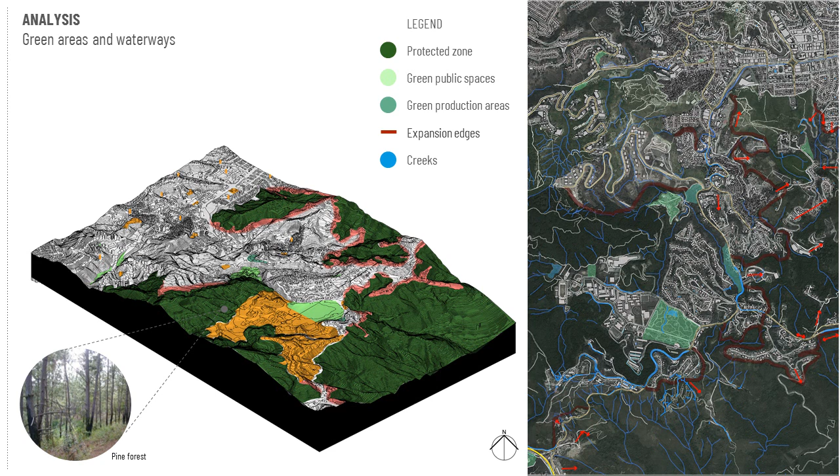This can acquire an important sociocultural and socioproductive role, together with institutions located in the different sectors. These are close to various green areas that need to be protected, such as large wooded areas, integrated, such as existing parks, or intervened, such as areas that are wasted, devalued, or unstable. Currently, what keeps them related are the roads, and some have been extended enough to have the opportunity to merge, such as that of La Limonera with Manzanares.

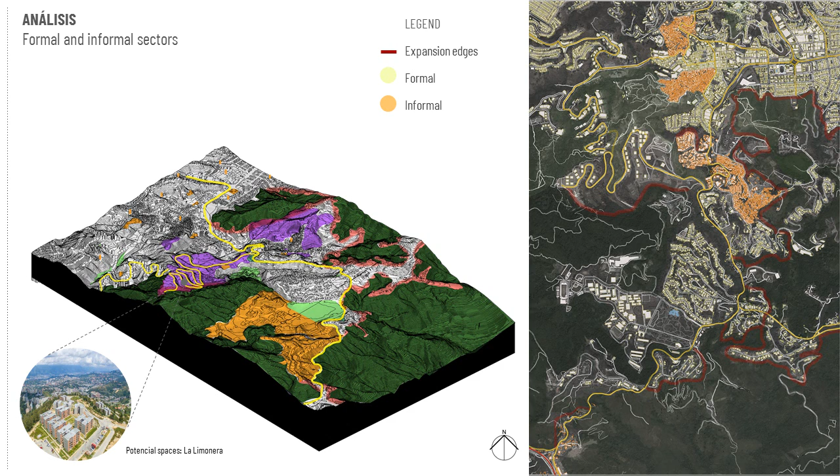Throughout the green areas, the aim is to create integration spaces between the formal and the informal and the less consolidated areas. The objective is to generate a symbiosis between the communities of Baruta that today are disconnected, creating spaces that take advantage of the existence of educational institutions and the opportunities offered by the land as a dynamic of University City, where academic, recreational, and productive activities take place, with a sense of ecological and sustainable development.

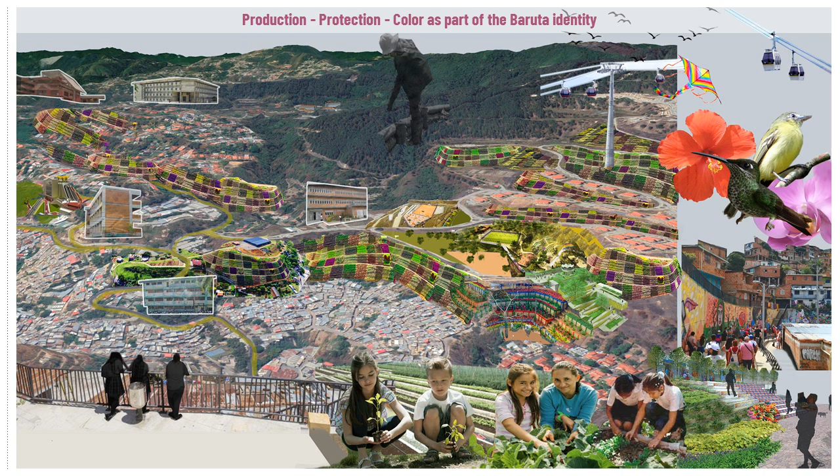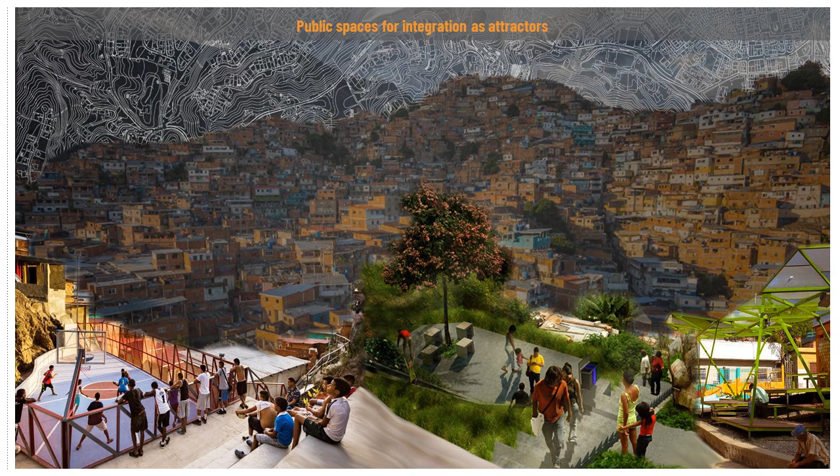Considering issues such as the protection of the environment, production, and color as a part of the identity of Baruta, as well as educational institutions as promoter, public spaces for integration as attractors, and mobility and meeting spaces.

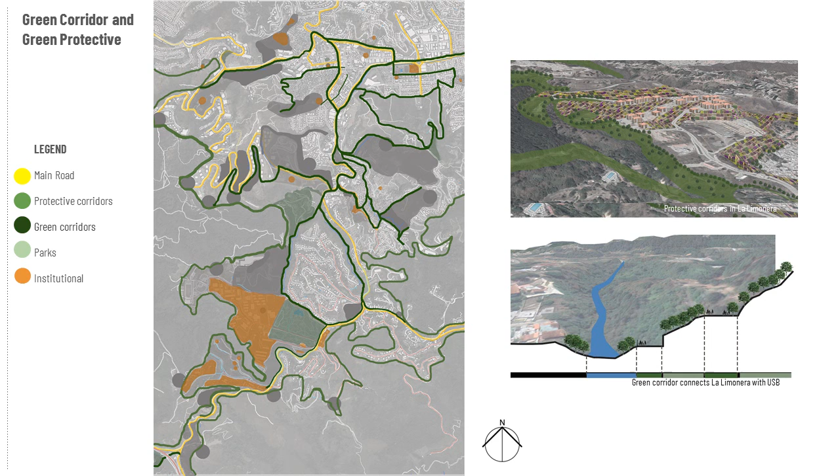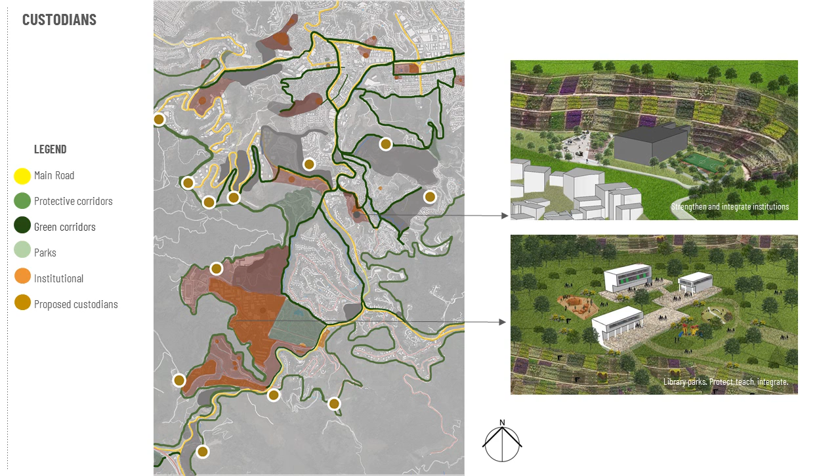In our project, we propose green and protective corridors developed around protecting and generating connections by relating existing institutions with communities. From this relationship that we seek to generate, we propose new custodians through educational and sociocultural facilities, such as library parks, around which our field of expansion will be demarcated, while promoting the existing educational centers.

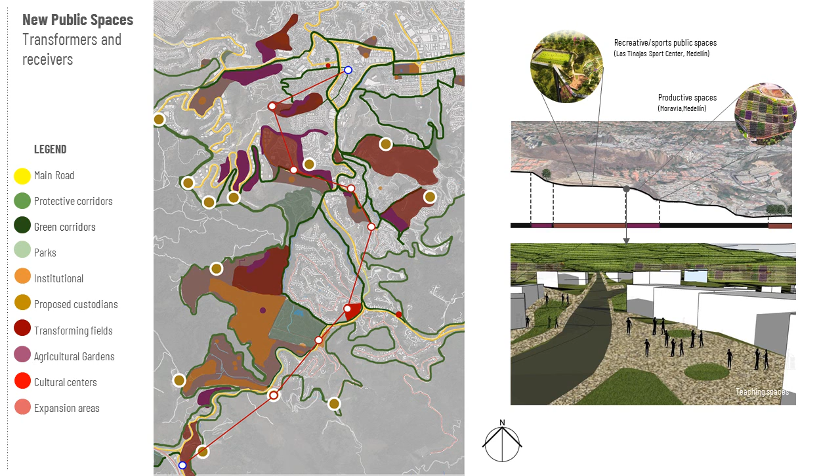Potential areas are identified, where public spaces are proposed with training and recreational activities for the integration of communities. Areas are available for relocation and residence, as well as productive spaces to control the growth and sustenance of the communities. Connectivity is reinforced through a cable car system that allows bringing education and culture to the communities, connecting public spaces associated with institutions.

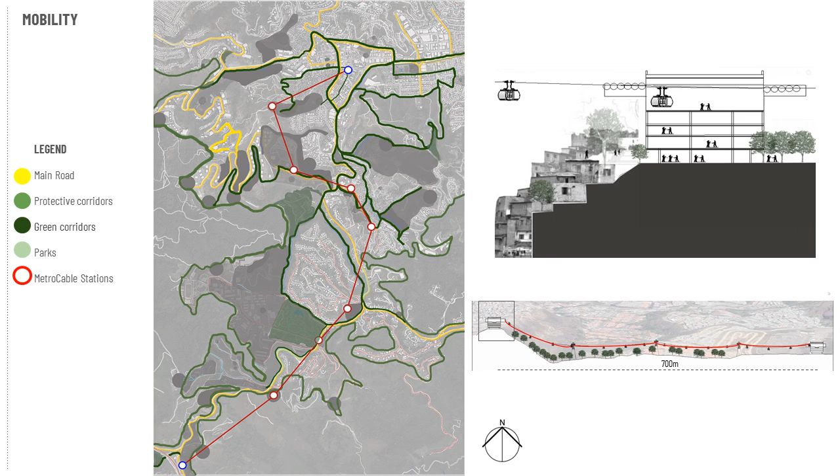At the end, there remains an integration of the public space linked to educational and cultural facilities through a system of connectivity with a sense of ecological development and protection.

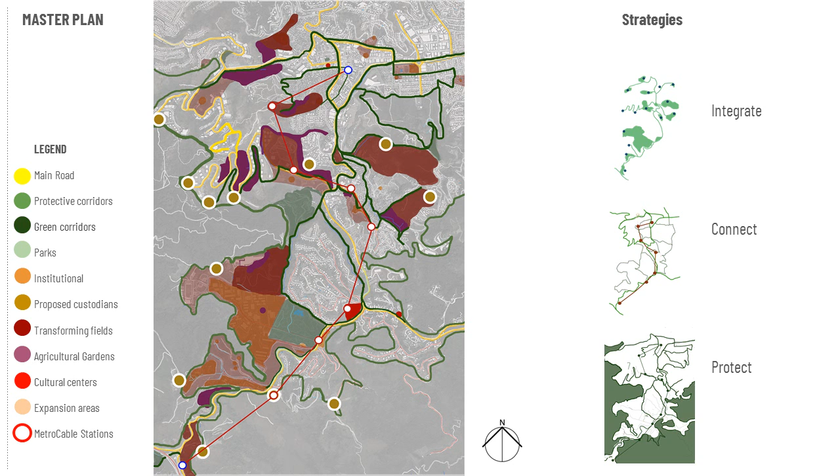We start the intervention in 4 points that will allow the project to connect with the rest of the city, integrate the communities, generate connections within the same project, and strengthen the role that the university can take and contribute in the site. Intervention 1.

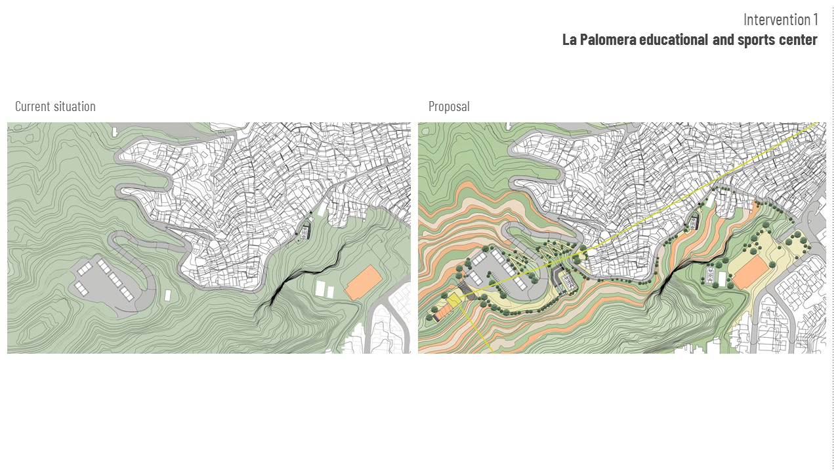La Palomera, Educational and Sports Center. In the La Palomera sector, there is a lack of public spaces, due to its status as an informal settlement, resulting in a lack of accessibility to the neighborhood.

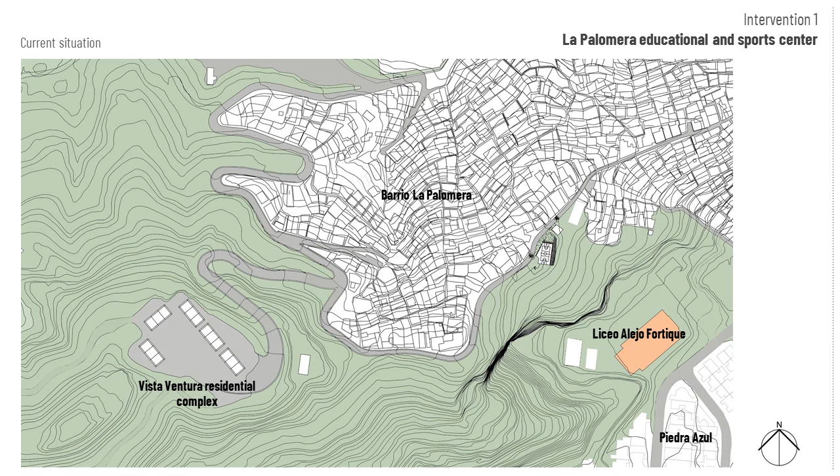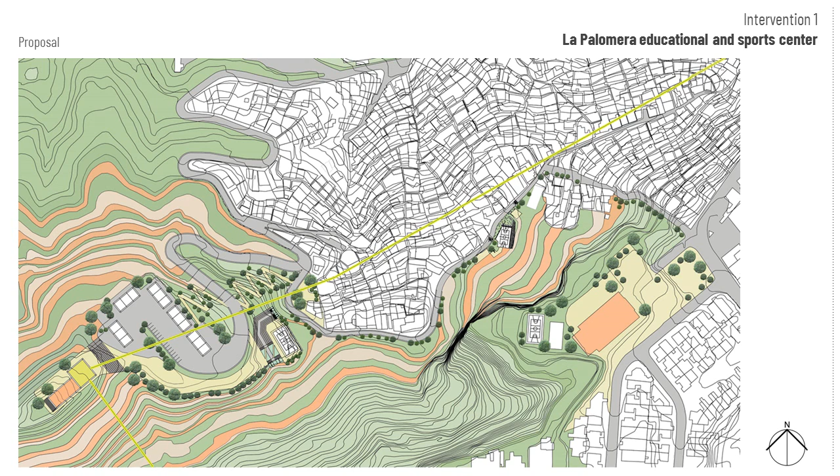The proposal seeks to give them the opportunity to recover these spaces for the enjoyment of the community, promoting educational, cultural, and sport activities. Likewise, a cable car station is proposed that connects both north-south and east-west, in this case directly with the town of Baruta.

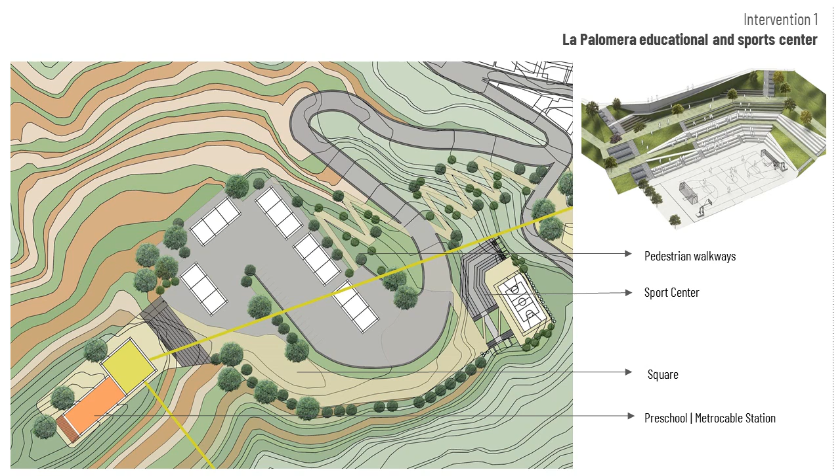Mainly, an attractive point is proposed, finishing in the highest part of La Palomera, guaranteeing more generous spaces to the community and providing a sense of belonging to the sector, in addition to having greater possibilities of connecting with the other sectors.

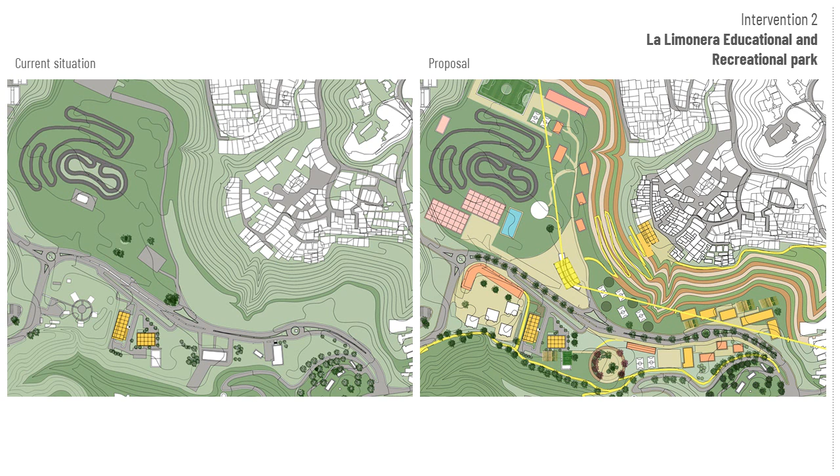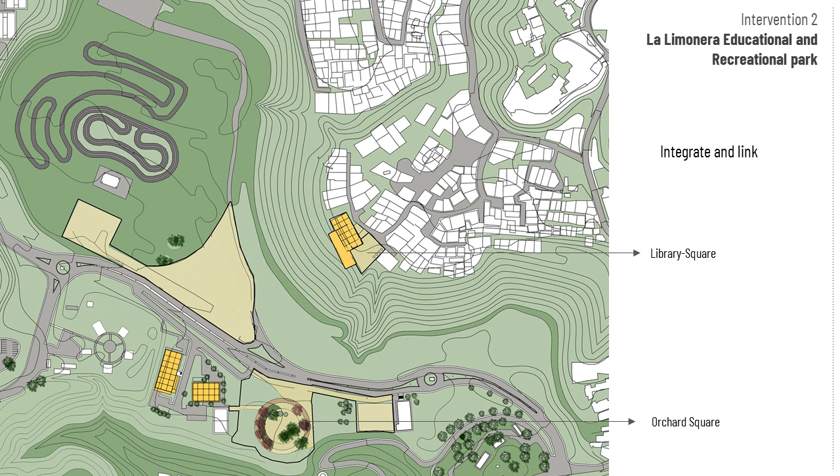Intervention 2. La Limonera Educational and Recreational Park. In La Limonera, there are not integrated activities and neglected space. In response, public spaces are generated and links between the communities, the park, and the institution, generating connections from existing institutions in response to the lack of a pedestrian system.

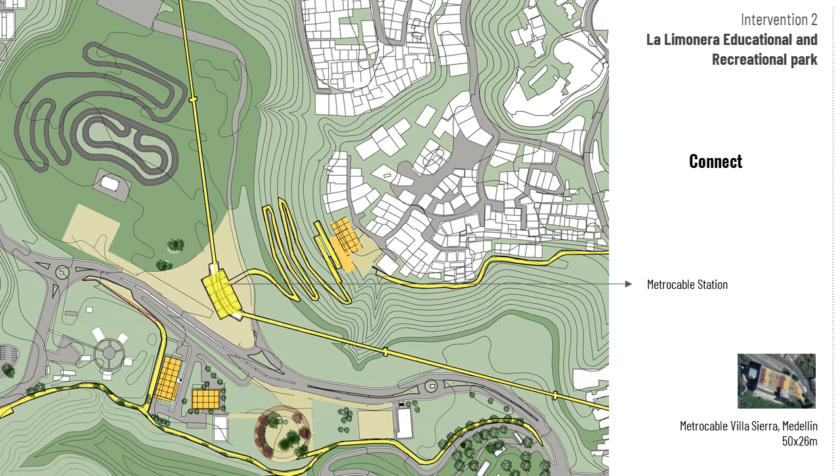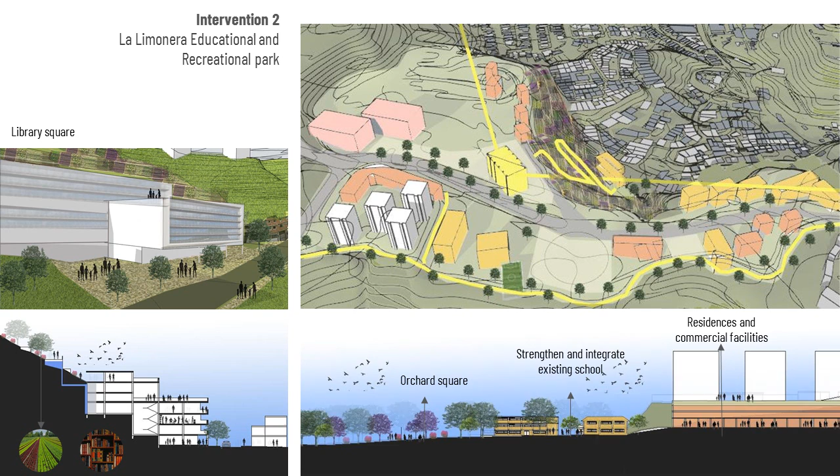It is proposed to be equipped by taking education and sports to the different communities, occupying unused space. The proposal allows the integration of the city through a central focus on sports, and the support of the institution to have space for training such as library parks, generating production areas and public space for the enjoyment and interaction of the communities.

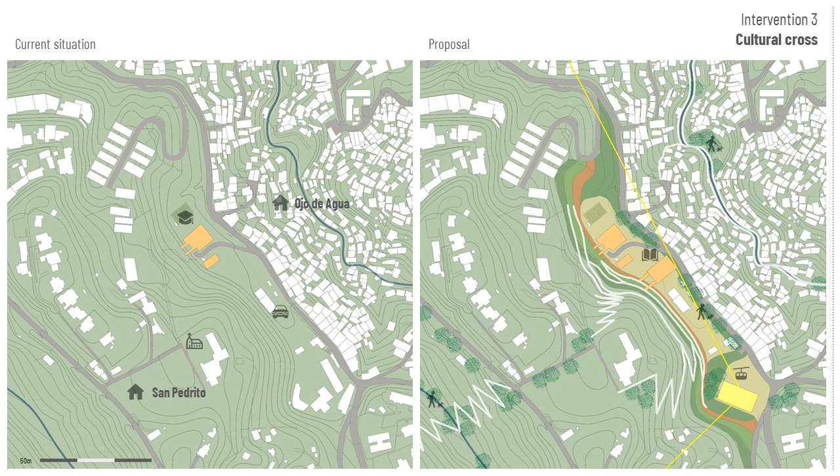Intervention 3. A cultural cross, Fe y Alegría. The intention of intervening in this area is to connect the proposal in its west direction with activities that complement the existing educational institution and offer common space for the communities of formal and informal settlements, proposing a metro cable station that improves mobility and stimulates commercial activities.

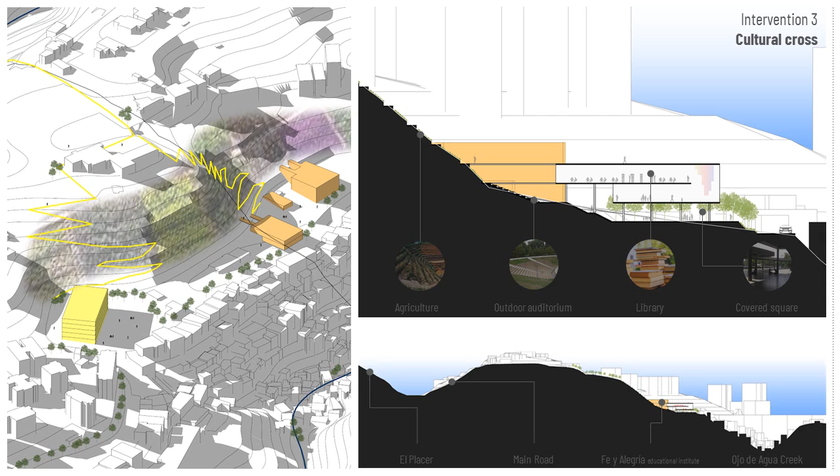The first phase begins with the educational unit Fe y Alegría Colegio Monterrey.

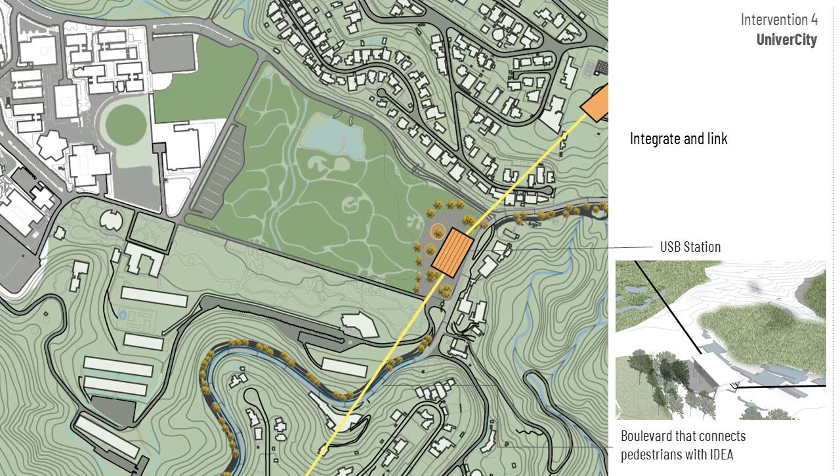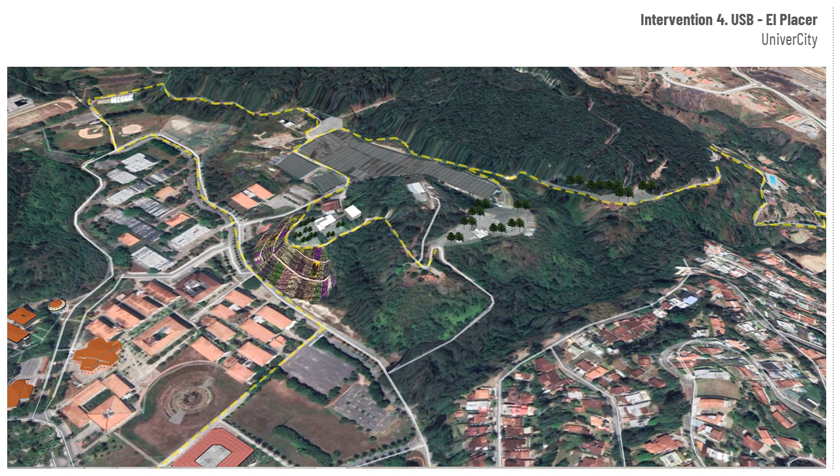Intervention 4. UniverCity, complemented by the metro cable station, allowing greater access to knowledge and activities that the university can offer. Also, at the north of the university, the existence of the nursery garden and the informal connection to the park are used to generate a green boulevard with space for open classrooms.

Education plays the social role of educating and the urban role of ordering, guarding, and protecting. Thus, we generate an educational network system that connects educational and cultural facilities and allows their integration through public space for the community and the recovery of disused natural areas.

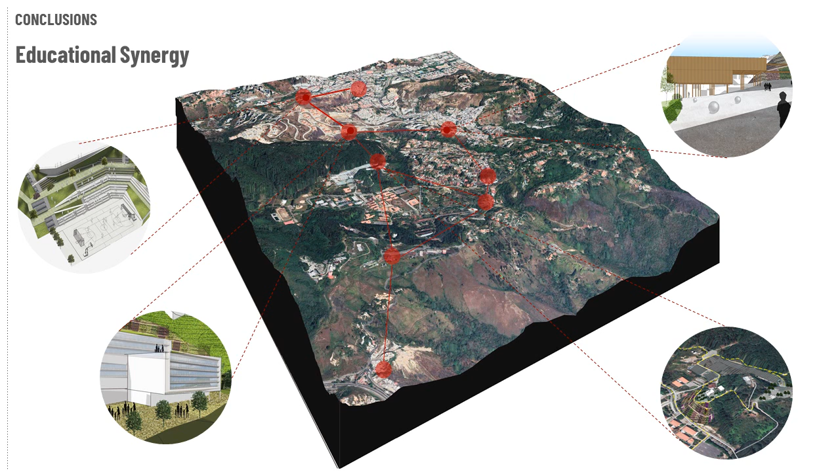The components of the project allowed the dynamics of the sector to change in a positive way. The new spaces became community nodes that receive residents of the neighborhoods as well as people from the planned urbanizations.

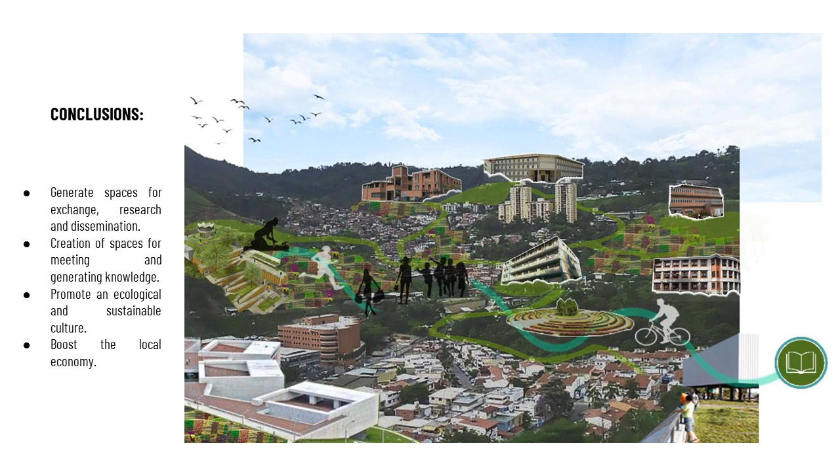In conclusion, the project seeks to generate space for exchange, research, and dissemination, which promote both academic and recreational activities as well as ecological and productive activities as an educational tool, supported by the sense of belonging and identity of this space, with institutions being the promoter of the learning process.